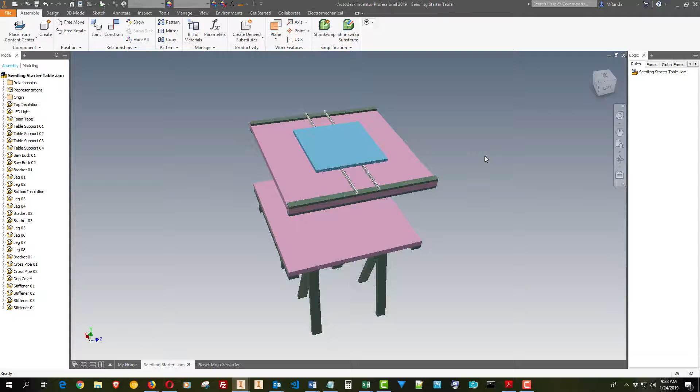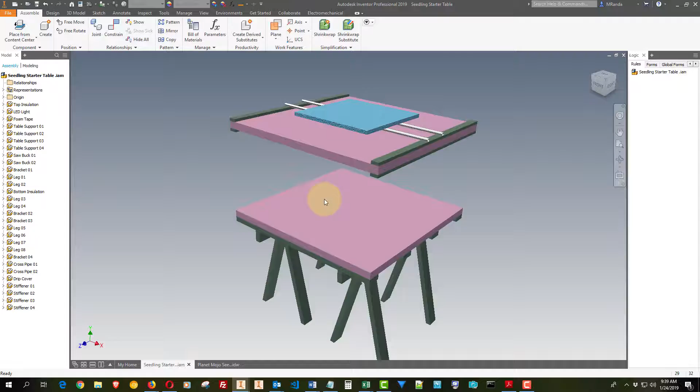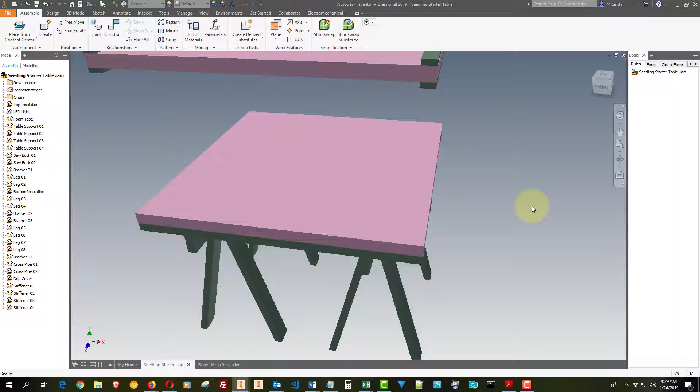Today I'm going to be showing you some details of my seedling starter table. What this is, is two custom-made sawhorses with 4 slats. This is all 2x4s, and a roughly 4x4 sheet of 2-inch thick insulation on top of it. This is all designed to be stowed away during the summer because I have no room for something like this.

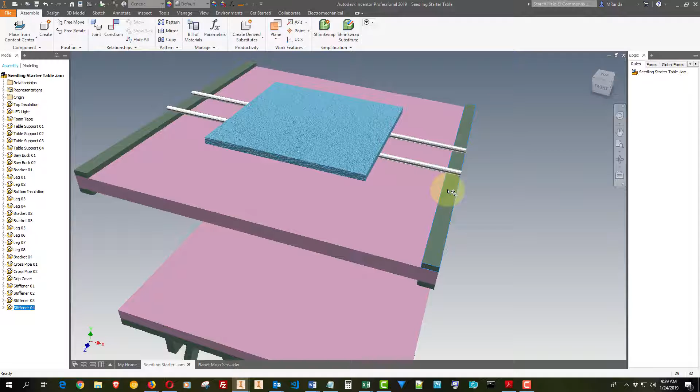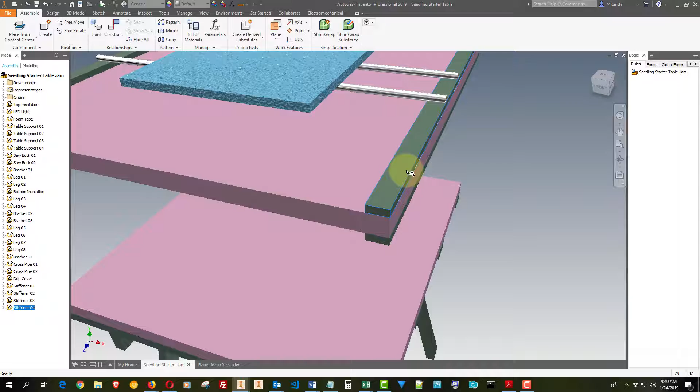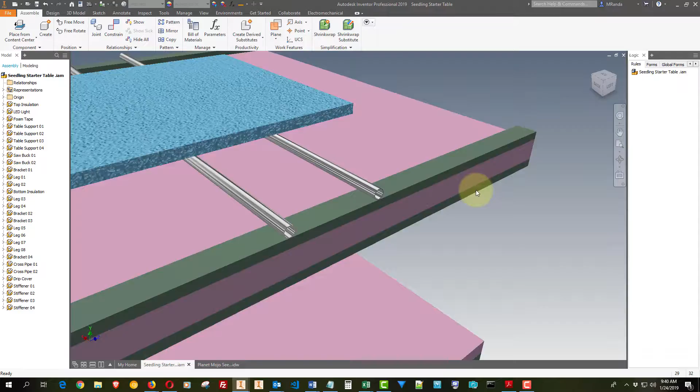The top part will be suspended from the center pole in the greenhouse, and it'll be suspended by two pieces of conduit. Well, let me work my way up to that. So the top part is the other half of this 2-inch insulation sheet. At the sides, they're going to have 2 1x4 pieces of treated lumber, and they'll be bolted right through from one to the other with fender washers, and have 4, maybe 5 1/4-inch bolts on there. I didn't put that in here, but I probably will on the finished drawing. That gives me the strength to suspend this from the ceiling.

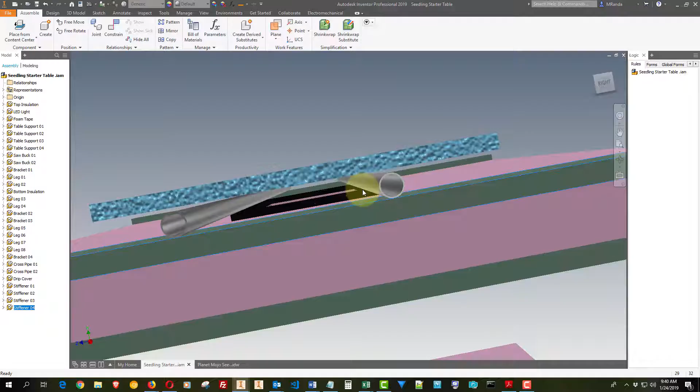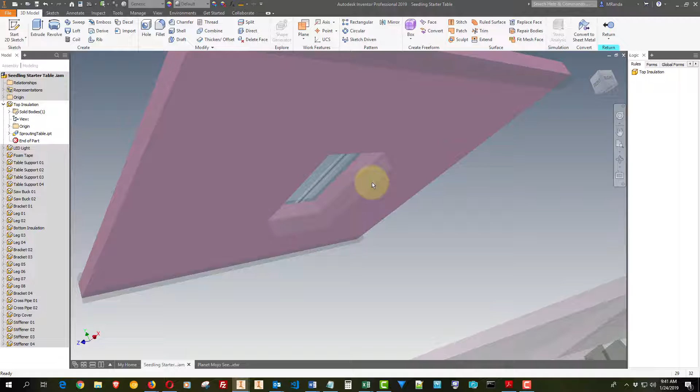These are 2 pieces of 3/4-inch conduit, electrical EMT conduit, which will have just your standard U bracket and screwed down to the wood here. They'll travel all the way across to the other side where they'll be screwed down as well. Let me show you this here. Everything's transparent now except for the 2-inch insulation. There's going to be an opening cut in the center, which is the same size as this light. I'll show you the light a little bit later.

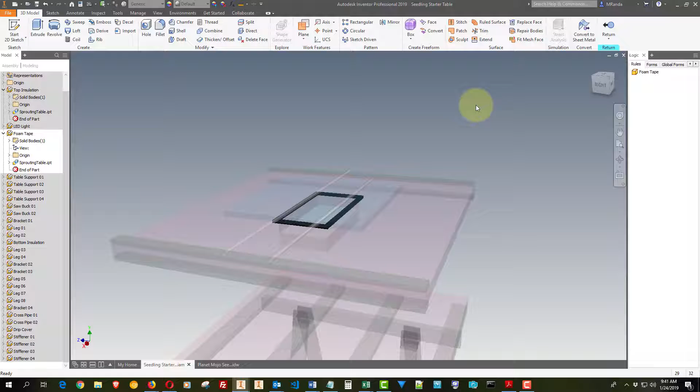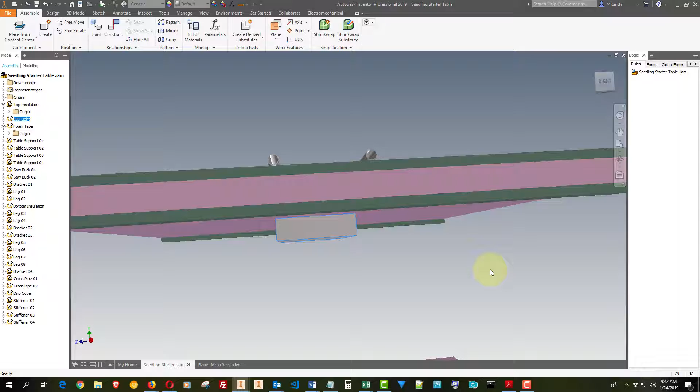The opening has some weather stripping around the edge, and what that does is there is a ton of water in the greenhouse, and any that drips onto this insulation here, if it runs towards the opening, it'll be stopped by this. Otherwise, there's a chance that the light can have water drip into it. The top of the light, I don't have any of this modeled, but I believe it's 2 fans in here. So the top of the light is exposed to this opening, and it has 2 holes for the fans. It's a very powerful LED grow light.

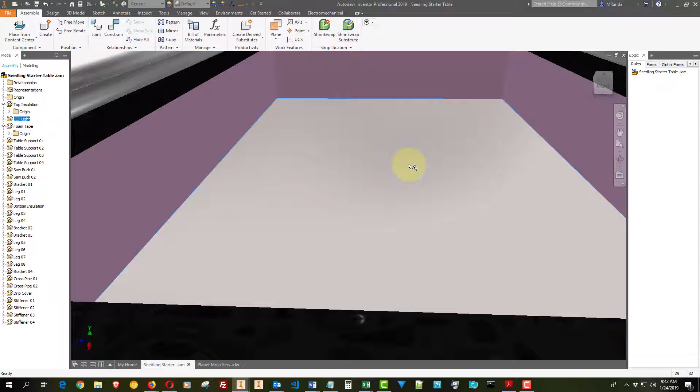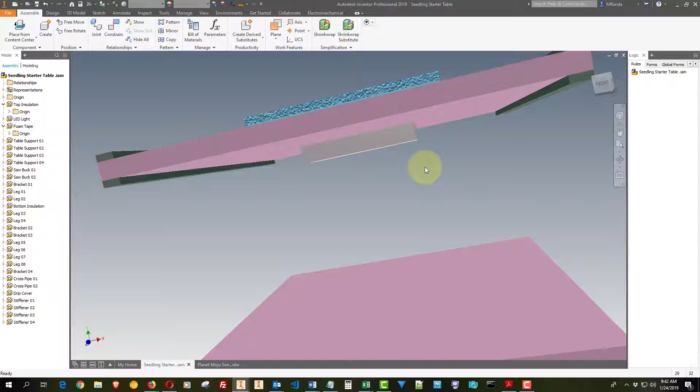I guess it's for, well, it is for pot. That's what it's made for. Not what I'll be using it for, but that's what it's made for. So it's a wide spectrum light with 120, what is it, 10 watt LEDs of mixed color that simulate daylight. So these get fairly hot, so this is a way for the heat to escape via the fan. When the fans are off, the heat should be able to escape through here.

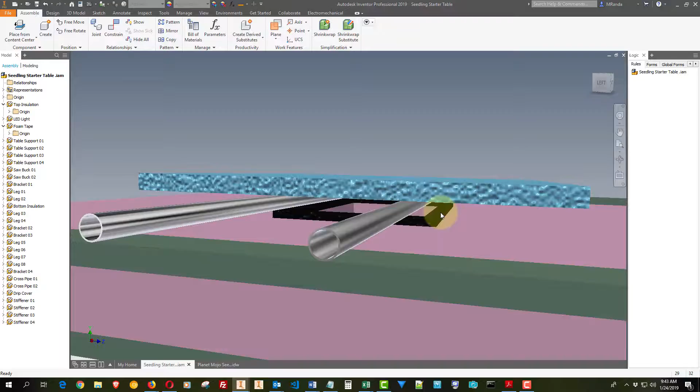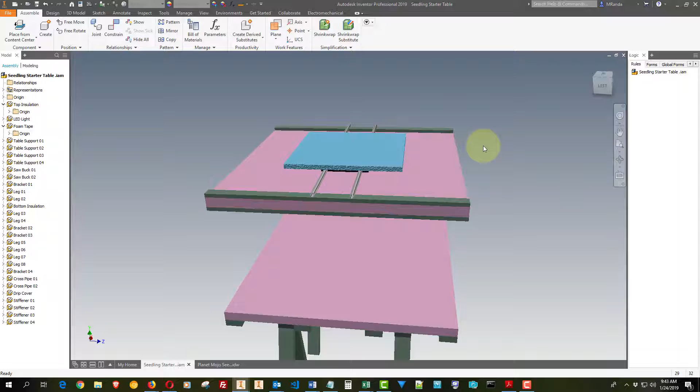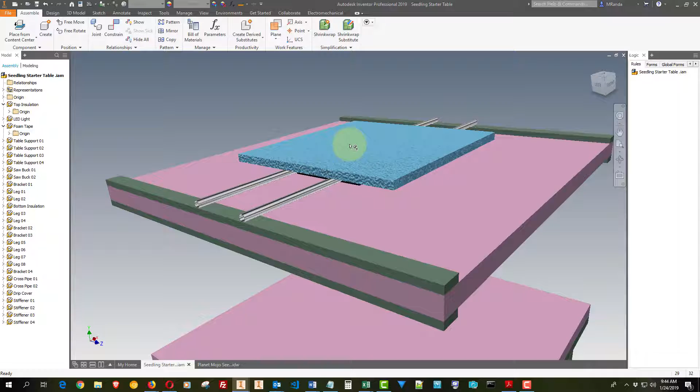So the method that these will be hung is, I'm not sure if I'll use these pipes to hang or not, or if I'll attach some eye bolts to the wood here. Still pondering that. I don't have a whole lot to hang this from, so I'll have to kind of do that by eye once I get it further along. This right here keeps the water from dripping straight through the hole, so it would drip on this. This is 1-inch insulation, this is 2-inch insulation. So this is just resting on here; if I have a problem with it falling off, I can always just poke some holes in it and wire it to the conduit.

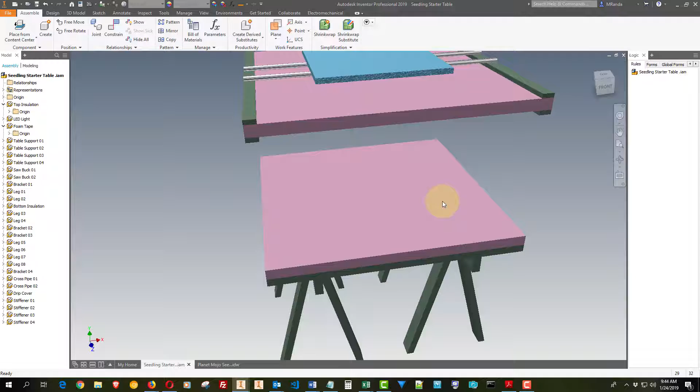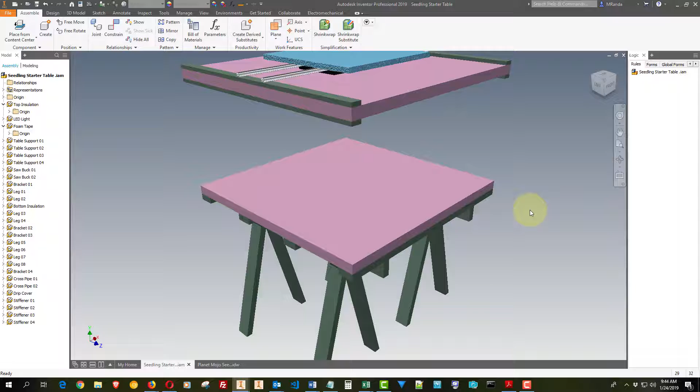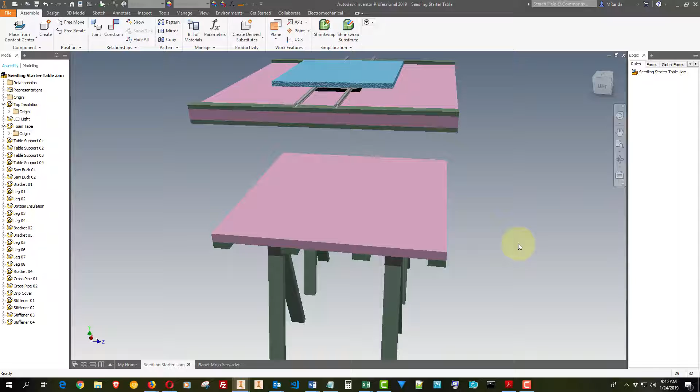Okay, between this upper part and the lower part, all I'm going to do is staple some heavy plastic and drape it down. Then on the table down here, this will have 2 heating mats that will keep the seedlings at, I think it's between 75 and 80 degrees. And the reason for the thick insulation is because it could be below 0 that time of year. I'm going to start these in March. March 15th is when I'm going to start sowing the seeds. So I have to trap heat in here, and I have a thermostat and a fan that will blow air out if it gets too hot, and as it cools down, it'll turn the heat back on. So hopefully it all works out.

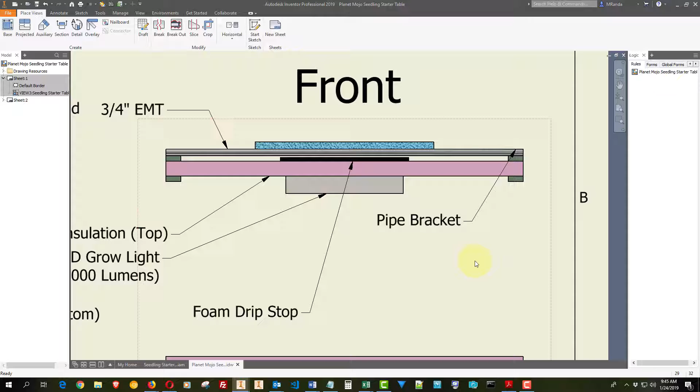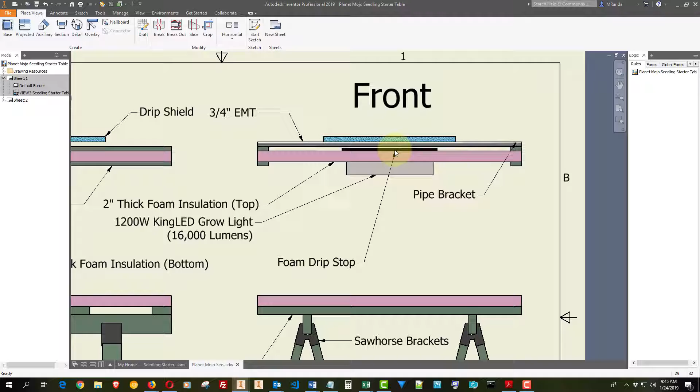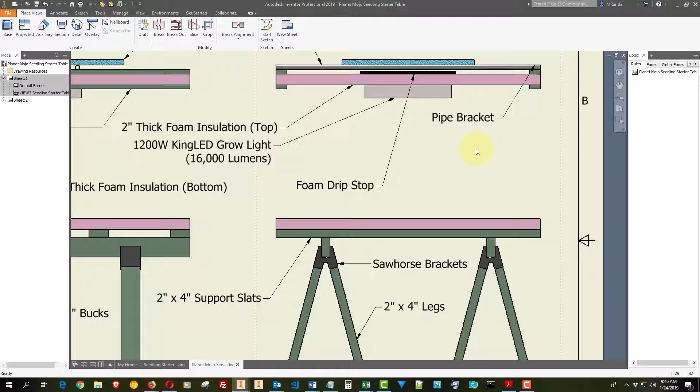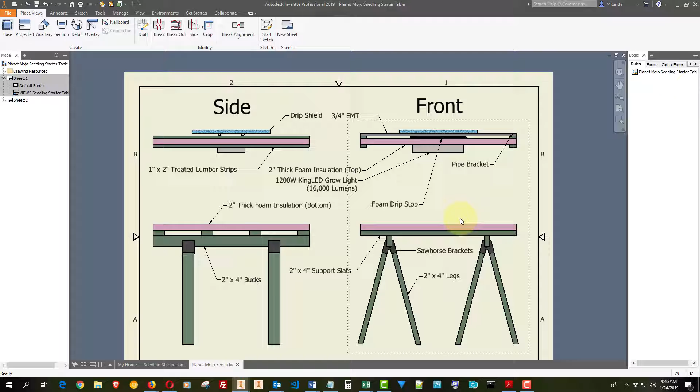I do have some initial drawings on this. Here's the overall unit, and here's some detail plans that point out the different elements. This is a drip shield, treated lumber strips. This is the exact model of light, 16,000 lumens, so it's pretty damn bright. They recommend 2 feet above the plants, and I've heard others say 4 feet is better, but I don't believe that. But anyways, this is just common materials that you can get at Menards or another big box store. So it should be pretty easy for anybody to make one of these if they so desire.

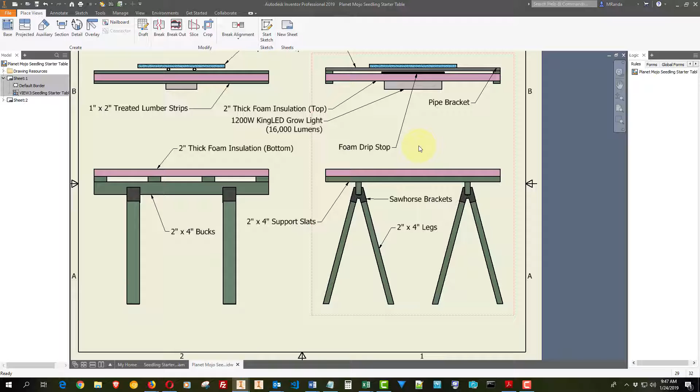I'm going to add one more page to this that has a cut list, all the different lumber and whatnot, what size to cut it, and some dimensions on the opening here, and basically a material list.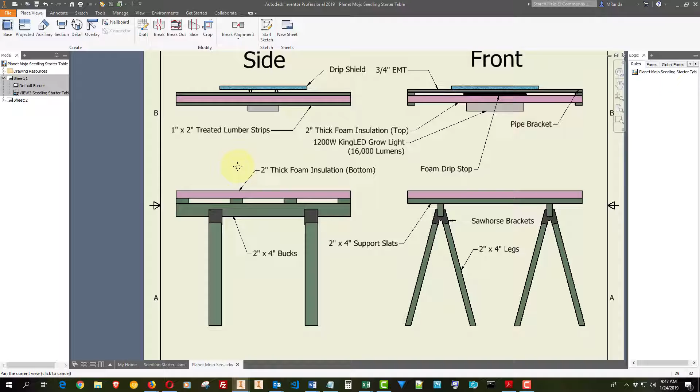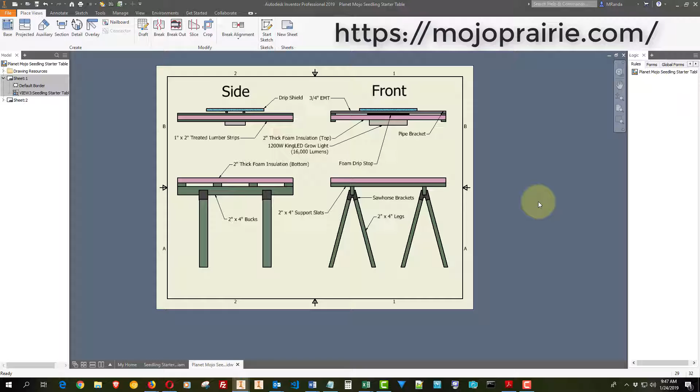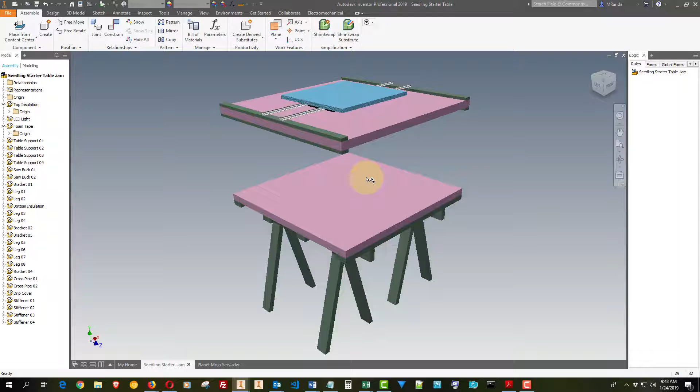Okay, that's about it. I based this around 2 heating mats because the size works out really well, and you can use half a sheet for the top and bottom. I have this 1 inch on hand, but this drip shield up here can really be anything. It can even be plywood. It's only got to be there for a month and a half, 2 months or whatever, until the seedlings get started and the greenhouse warms up. Once we get warmer weather, I won't need this anymore, and I'll switch the seedlings to pots, and I have a different setup for when the plants are in the pots. There's actual benches that I've designed, and I'll show that at a future date.